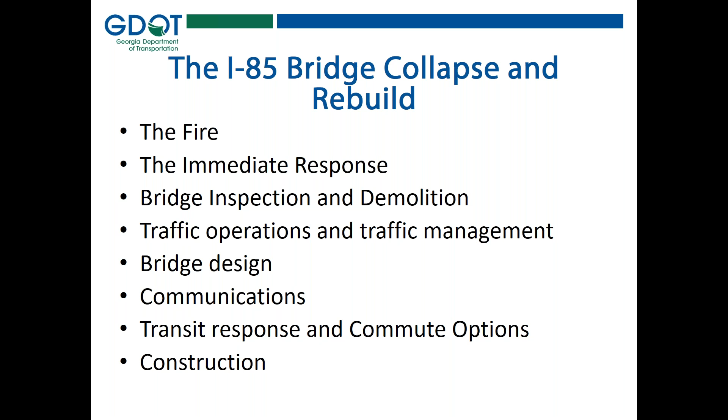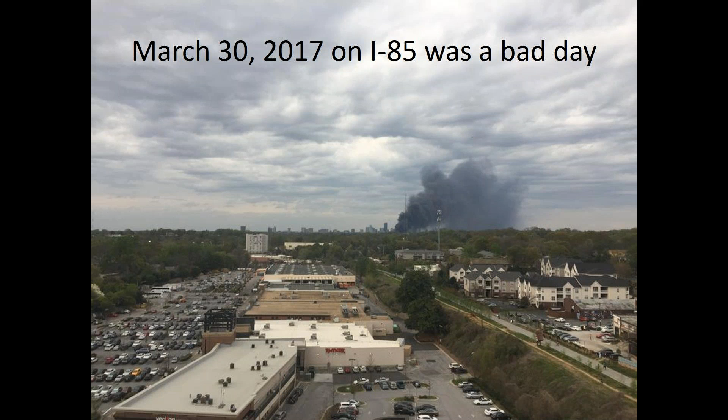So this was the view from my daughter's lacrosse game on March 30th, 2017. And I remember looking at the fire and thinking, gosh, what's going on over there? And then getting a phone call that it was a fire under one of our bridges. And then, not long after that first phone call, hearing that the bridge had collapsed. And for those of you who are not familiar with Atlanta, the tall buildings you see just beyond the smoke, that is not downtown. That is a northern business district called Buckhead. And so the main artery getting into the Buckhead business district, as well as downtown Atlanta, is Interstate 85.

So around 6:30 p.m., the fire broke out underneath I-85 northbound. At this stretch of I-85, it's a long bridge viaduct. It goes over some rail yards as well as some state highways, and then there's Peachtree Creek just north of the area. So it's a very long bridge viaduct. And if you can see, this is the beginning of the fire, and there's a lot of plastic HDPE conduit that was stored under the bridge. This was property that belonged to Georgia DOT, and there was a fence around it with a sign that said, "No trespassing, property of Georgia DOT."

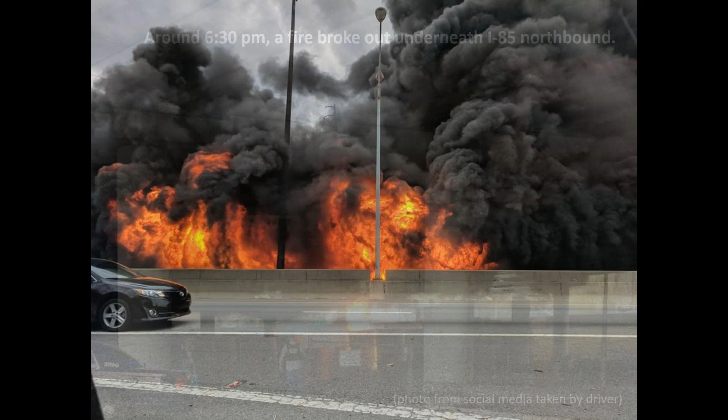And we don't really have all the information on who started the fire and why, but it quickly spread because there was a lot of material stored under the bridge. And this is the kind of plastic piping that you put fiber optic cable in when you're installing, for instance, an intelligent transportation system. So the fire grew very quickly. So it started at 6:30 p.m., but it was really looking like this, I'd say, within 15 to 20 minutes. It had really roared out of control.

And it's interesting to note that our main intelligent transportation system fiber optic cable trunk line is attached to this bridge. So when this fire started, we lost connectivity to our ITS system, which provides all of the message signs and video to view what's going on the system. Luckily, it had been in place for over 20 years. We'd never had to use our redundant system. We'd never had to actually rely on that. But in this case, the redundancy did kick in, and we regained connectivity to our cameras and signs on the system.

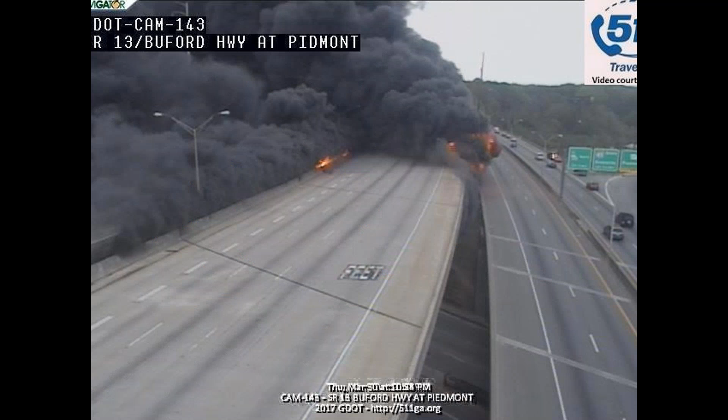So here's a couple of pictures that show the view from our cameras, from our 511 navigator system. What you're looking at here, the 5 lanes in the middle of the photo, that is I-85 northbound. Just to the right of the photo, there's a collector distributor roadway that we call the Buford Spring Connector. This is evening rush hour in Atlanta.

At this point, luckily, the traffic had been stopped and was not crossing the bridge. But as soon as we knew there was a fire under the bridge, our bridge inspectors had been summoned to turn around and come back to work and get to the bridge. So they were already en route.

What you can see in the top right of this photo is actually the transit system for the city of Atlanta, MARTA. That is their rail switching yard. So this bridge is very close to a major transit system there as well. And you can see that the collector distributor is sort of lower than the interstate highway there.

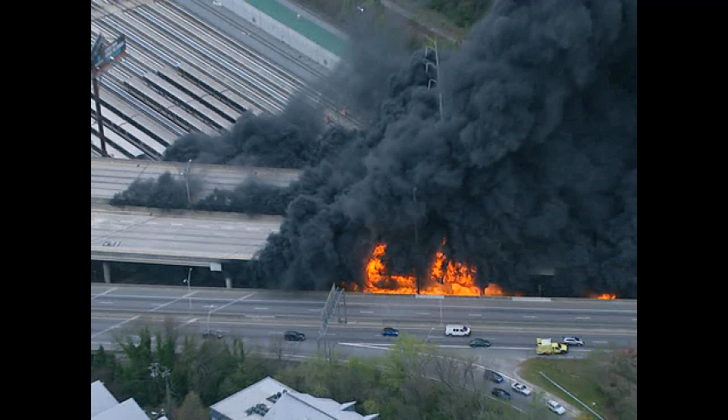So I-85 also crosses a major state route in Atlanta. It's State Route 237 Piedmont Road, and that's the road where the fire trucks are parked here. Emergency personnel were immediately on hand, and the Georgia State Patrol had stopped the traffic. The City of Atlanta Police were on hand, as well as emergency response units that work for Georgia DOT - we call them our hero units. And of course, Atlanta Fire and Rescue, and they were battling this fire as best they could.

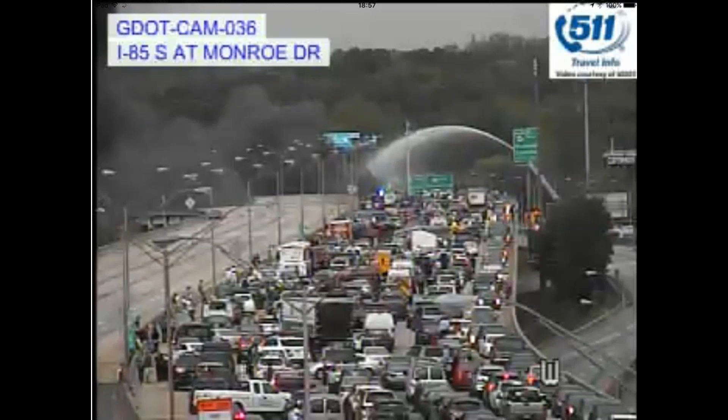Some of you may or may not be familiar with Atlanta - we're pretty well known for having some big traffic here. So you can see people hanging out on the bridge south of the fire, and traffic had been stopped for a while, and they're waiting to see if they're going to be able to get off this bridge anytime soon. I would say that the entire system was pretty much in gridlock.

This section of I-85 carries about 243,000 cars a day. This is a major commute route to our northeastern suburbs. And it's also, you know, in Atlanta, we use our interstates almost as local roads. So it's also a major route just between Buckhead Business District and downtown.

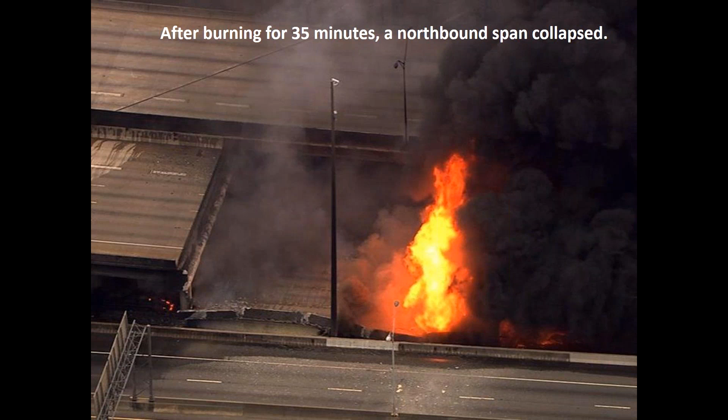So after burning for 35 minutes, one of the bridge spans collapsed. It was a northbound span. Luckily, no one was injured in this event at all, thank goodness for the police. Really, literally like 2 minutes before the collapse, the fire chief could hear the tensioning strands in the bridge starting to pop, and he immediately pulled back all the firemen, so no one was hurt at all when the bridge fell.

As soon as the bridge collapsed, at Georgia DOT, and probably at every DOT, there are some pretty routine things that we practice regularly for responding to emergencies. So immediately, all the folks who are on our Emergency Operations Committee started heading to our Emergency Operations Center to respond to this event. And we were met there by the Georgia State Patrol Commander, the Georgia Emergency Management Agency, the City of Atlanta had people there, as well as the Federal Highway Administration. This is Thursday evening, about 7:30 p.m., and everyone starts rolling into the Emergency Operations Center.

So the next few slides go through a timeline of our response. As you can see, the fire started about 6:30. About 35 minutes later, the bridge has collapsed, and we are all heading into work. Our state bridge engineer was actually having dinner with his son and brought his son to work because he had to leave immediately and head downtown.

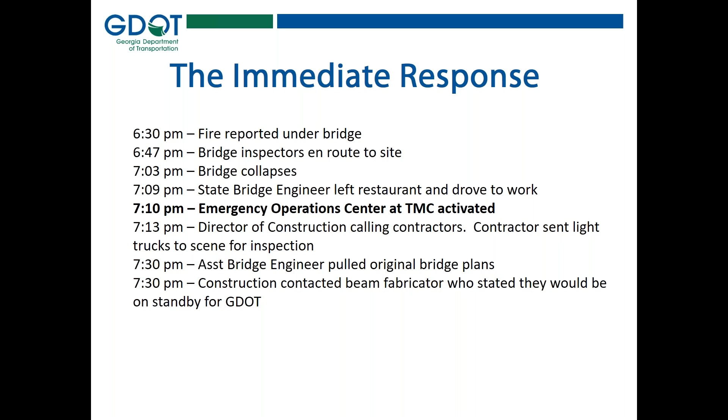For the next few hours, we were all on scene at the Emergency Operations Center, having hourly conference calls with our inspectors on the scene to get updates. The FHWA division administrator who was with us at the Operations Center let us know we needed to get our governor to declare a state of emergency so that this project would qualify for federal emergency relief funds. So we did that.

We had their immediate approval to negotiate with a single contractor because we knew that this bridge collapse was going to cripple traffic in Atlanta, and it really did. So they were very much in support of us following already allowed procedures in emergency relief and federal highway to negotiate with a single contractor.

At about 10:30 p.m., the contractor who had come with the light trucks called a demolition contractor, and they arrived on site because we knew that we would need to be able to get to work as soon as possible and show the public that we were making progress very quickly on this bridge.

At 11 p.m., there was a joint press conference held at the scene of the fire, which was still burning quite largely at this point, with the governor, the commissioner of DOT Russell McMurray, the City of Atlanta Fire and Police Chief, FHWA, our Georgia Emergency Management Agency, and the State Patrol.

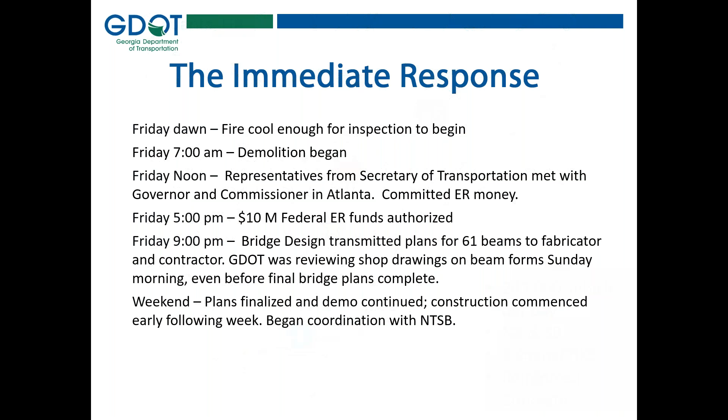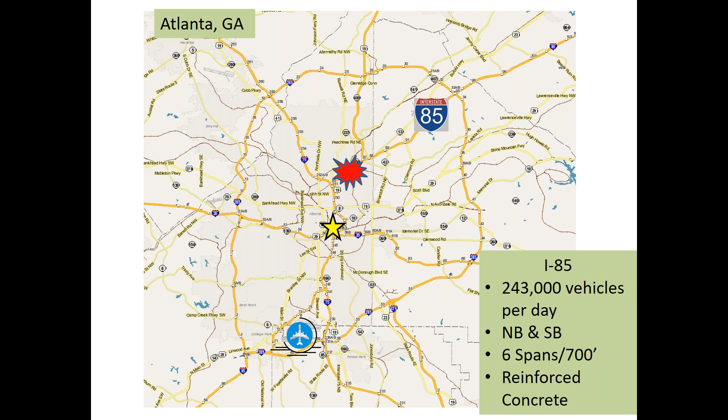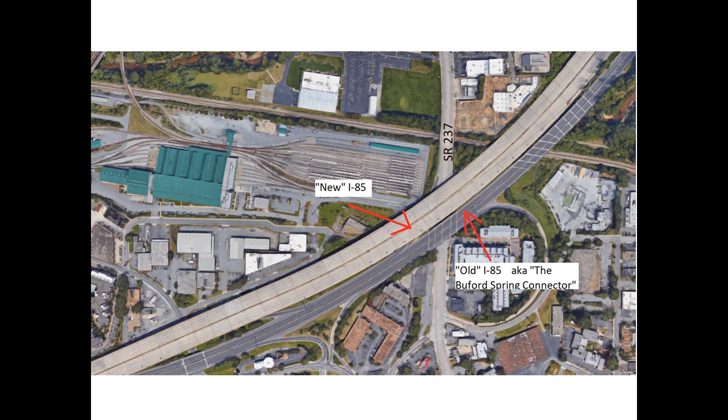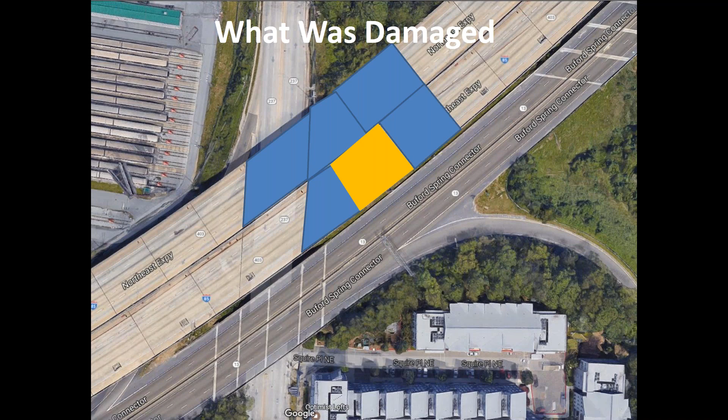Our inspectors, after they spent the night in our trucks, had to actually use water to wash off the bridges so that they could see to inspect. It took a while for everything to get cool enough to actually get in there and look.

They used hammers to sound the concrete, and they found serious delamination and spalling of the concrete beams, the columns, and the caps in the 5 adjacent spans. So we knew immediately that we were going to have a lot to work on.

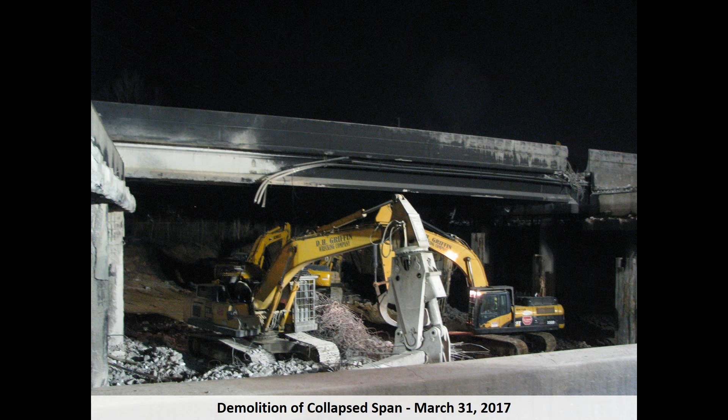Demolition commenced the next day, with a contractor called D.H. Griffin out of North Carolina. They happened to be in town because they were demolishing an old GM plant north of Atlanta, so luckily they had this equipment very close by.

We immediately contacted a consultant firm in Georgia, Moreland Altobelli, and they committed to doing the construction engineering and inspection for the rebuild of this project. We also contacted the contractor who did the work for us, which was C.W. Matthews.

During the demolition, Moreland Altobelli, the CE&I consultant, kept track of the labor and materials and equipment because the demolition was done under force account.

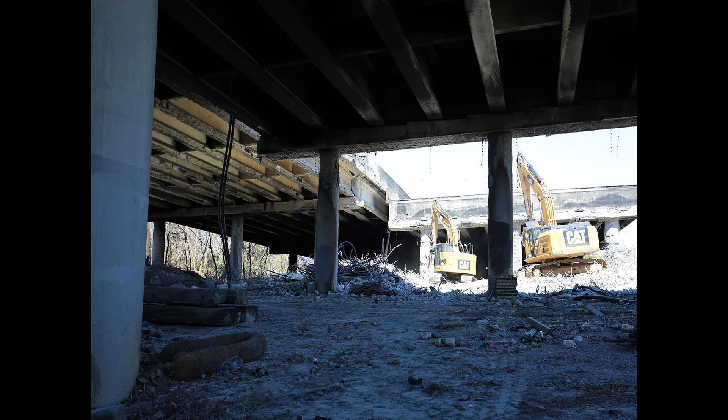You can see some of the equipment they were putting to use here. They used hydraulic crushers to literally chew away the bridge, and these machines separate the steel and the concrete concurrently. It was all hauled away in dump trucks, and within a week, the site was completely clean of debris - they worked 24/7 on demolition.

The inspectors were on site during demolition to make sure that elements of the adjacent spans that were to remain in place were not damaged.

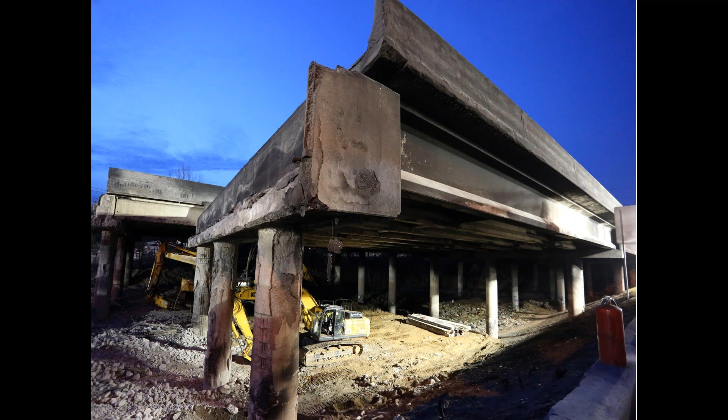This demolition shows that some of the damage was to the columns and the caps, but you can notice that the beam support did not fall - it was the beams themselves that collapsed. The extreme heat caused the tensioning strands in the massive pre-stressed beams to relax, and thus they failed and collapsed.

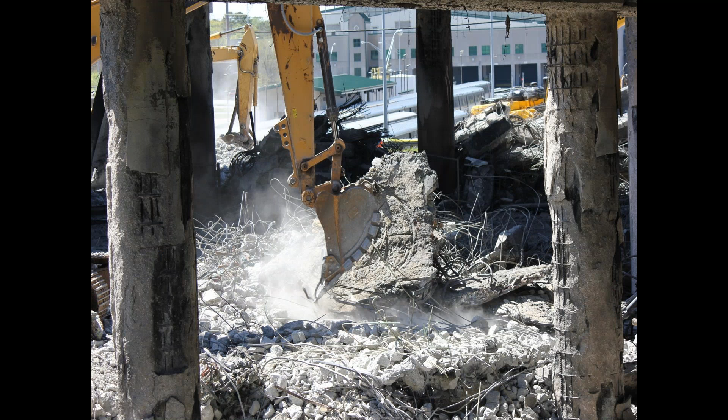Just so you know, this bridge was actually built in, I think, 1984 or 85. It was a good, strong bridge, in good condition. So it's not like this was an old bridge that had already been compromised in any way. This was a good, strong bridge.

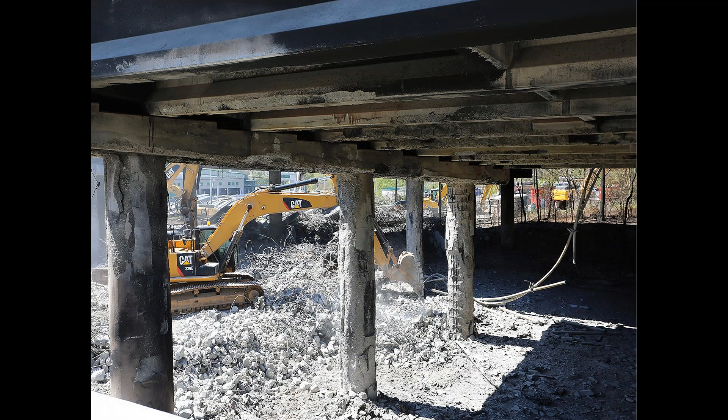You can see from this picture the rebar being exposed on the columns, and the column reinforcement appears to be buckling. Our bridge design team had to make quick decisions about what could be recovered out on the site and reincorporated into the new design, or if it all had to come out. We ended up keeping part of the columns, and I'll show you some of that in the upcoming slides. You can see here where the concrete on the columns and the beams had delaminated.

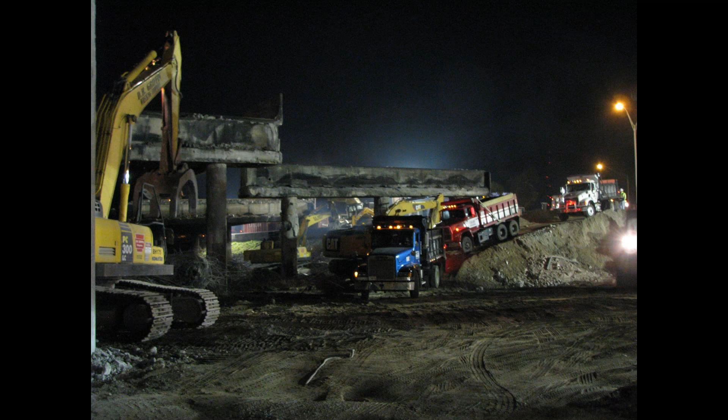Just a couple more pictures of demolition. And this is one of those giant pneumatic crushers. They looked like little alien monsters. And of course, the demolition continued 24 hours a day, 7 days a week. And yes, there is an apartment building right next to this bridge.

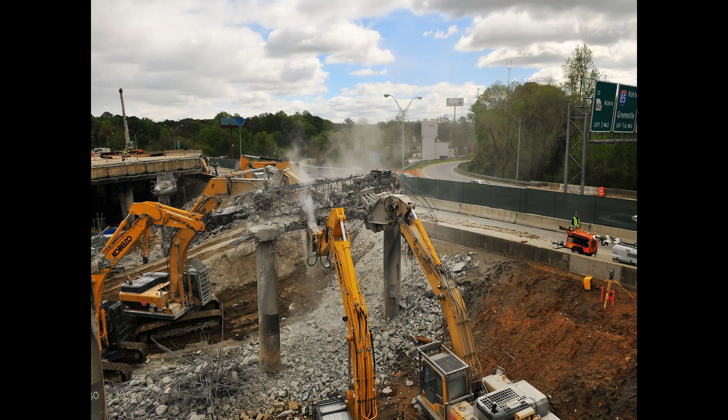So we didn't make all friends; in this speedy repair of this bridge, there were some people who were really unhappy. But it was really important to get this done quickly. And they had a lot of equipment put to work, and so the demolition progressed so quickly because they had so much equipment out there getting it done.

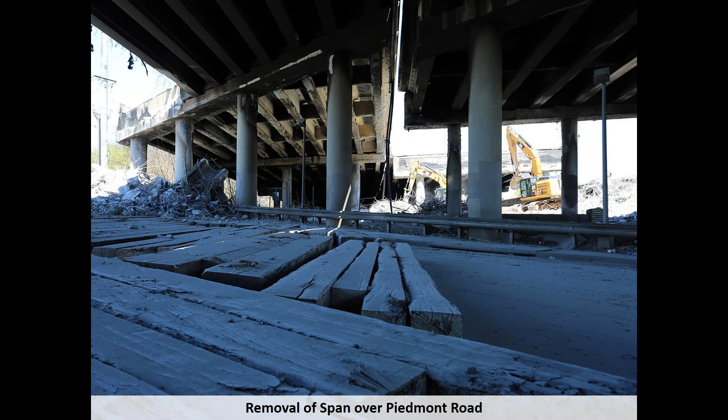One of the critical things they had to do was remove the bridge spans that are over State Route 237, Piedmont Road. And so you can see here the contractor placed timbers over the roadway for protection as the beams above it were removed, because we knew that at least we needed to get Piedmont Road reopened, even though I-85 was going to be shut down for a while.

So those initial few days where Piedmont Road was shut down and I-85, it was really hard to get across town without going way, way out of your way. So with the span removed, Piedmont eastbound could be fully opened, and then the 2 lanes westbound could be open a couple days later.

So this sort of starts where we really had to look at how we are going to keep moving traffic through and around Atlanta and to the Buckhead Business District, and even to the businesses surrounding this collapse. And so our state traffic operations engineer worked very closely with his team and with the city of Atlanta to look at roads that needed to be restriped and how to best get traffic off of the interstate. We actually changed the direction of a couple of one-way streets. We put a lot of things in place to try to make sure that the traffic could still move around and do what we could from a traffic operations perspective to increase throughput.

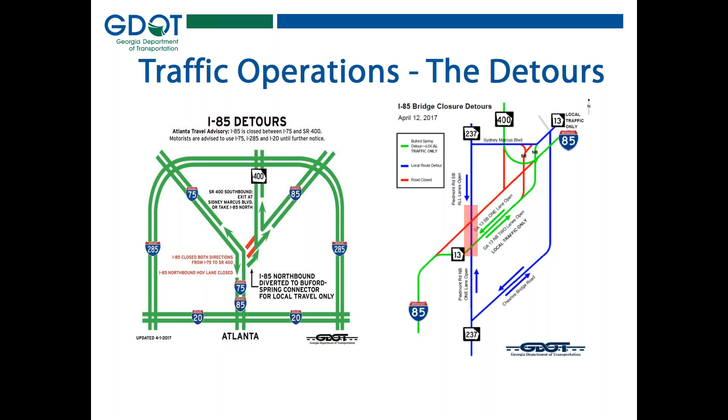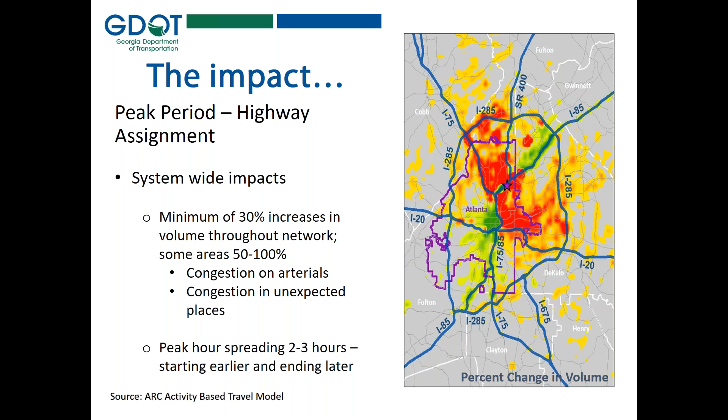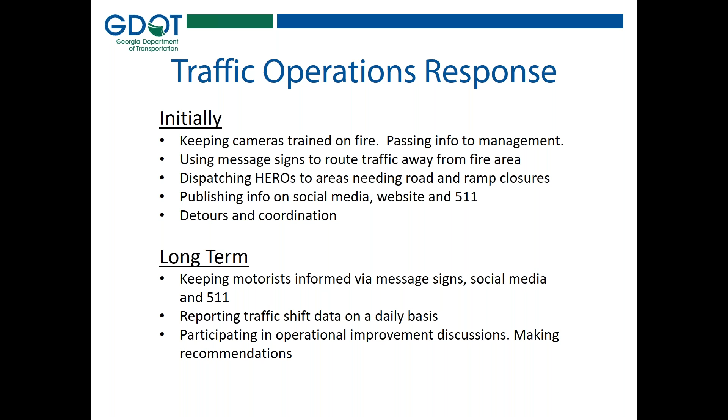So as part of our traffic operations response in the emergency situation, we kept the cameras trained on the fire, we had our HEROs dispatched, and we started pushing information out through our 511 system. But long term, we really had to keep motorists informed via message signs and social media. We reported traffic shifts daily as things were able to close and open. And we participated in a lot of operational discussions with the city of Atlanta.

But one thing we had to do is we halted all lane closure permits in the metro area, whether for buildings or utility repairs or other projects, because we just couldn't afford to have lanes closed anywhere in the vicinity of this detour.

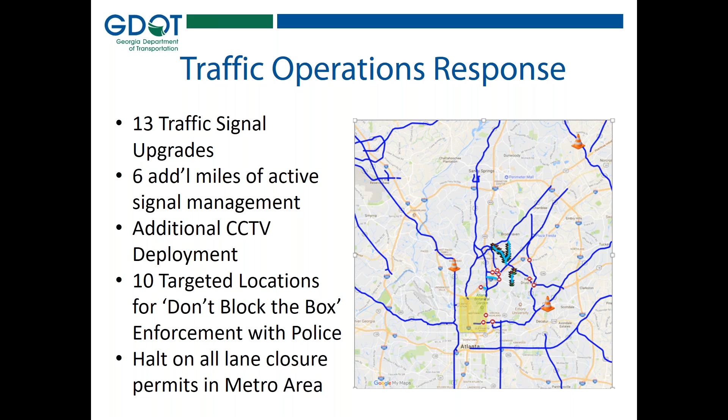So now I'm going to talk a little bit about the bridge design aspect of this project. So sequential to the demolition, bridge design began working Thursday night and immediately started looking at what were their options for design. Because of the complicated trapezoidal spans, they had to make a decision: could they use the original bridge design or did they need to redesign this bridge?

So the original bridge was designed using AASHTO Type 5 pre-stressed concrete beams. And there really are no forms left at the concrete casting suppliers for that type of beam anymore. So we knew that if we were to go with the original bridge design, it would be a long time getting those beams fabricated and to the site.

So they instead decided to change to a more commonly used beam that we have now, the 63-inch bulb T beam, because there are many forms available, and so we would be able to get the bridge beams cast much more quickly. But this required a complete redesign of the 6 spans of the bridge. But in their talks with the contractor that makes these beams, it was decided that really, if we wanted to get this bridge open quickly, that was the only way to go.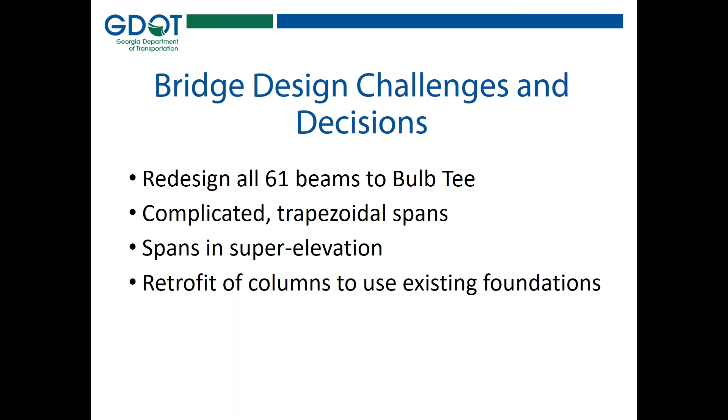So we said we need to have a press conference and try to address everything and answer questions right up front. So our construction director talked about the plan for rebuild. I talked about the redesign. Our commissioner talked about the material under the bridge. And then our traffic engineer, Andrew Heath, talked about the detours and what we were going to do to try to manage traffic in the meantime.

But really, the communications effort on this project was huge, and it continued for the next 6 weeks, where we had weekly press conferences out on the job, and our social media following increased 100-fold, because really this just had Atlanta paralyzed, and everyone was waiting for information about this bridge.

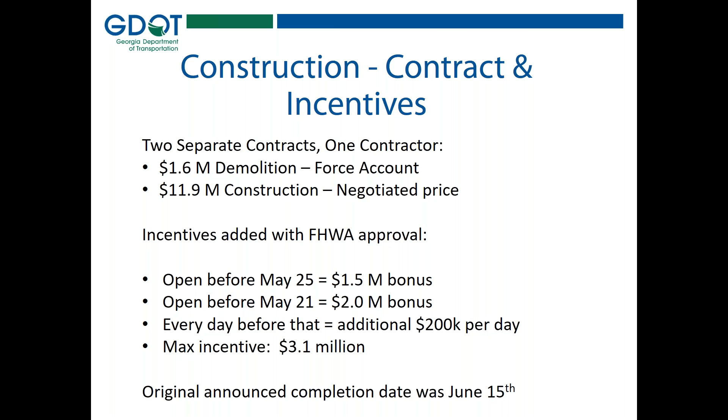So what we ended up getting was actually 24/7 work because the contractor was very incentivized by that maximum $3 million bonus. And weirdly enough, we had half a day of rain in that whole 6-week period. So they had perfect weather for construction for 6 weeks.

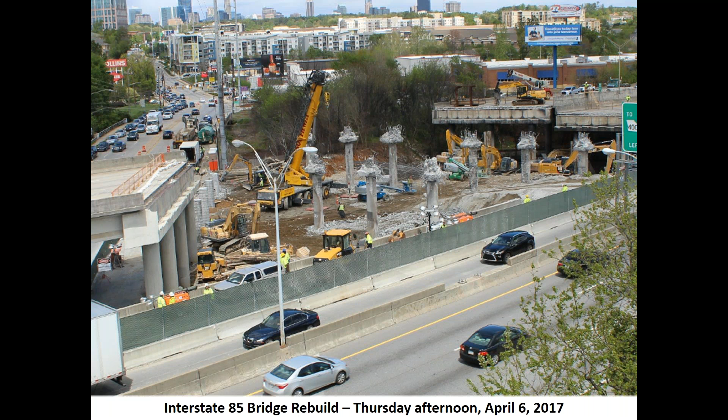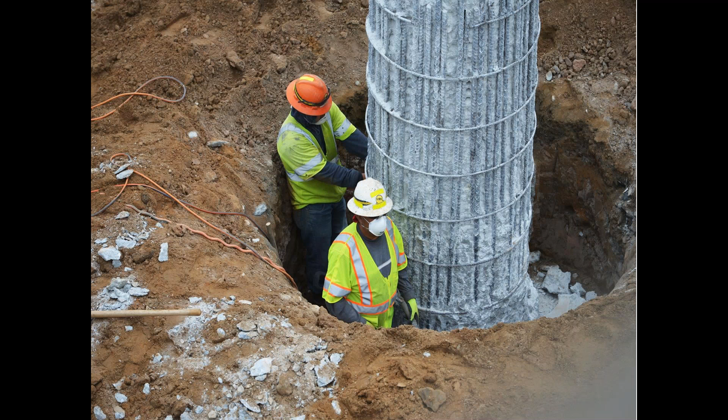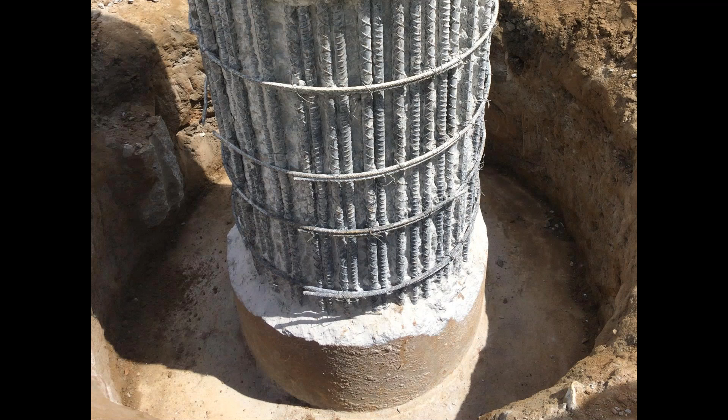Here you can see where they had to do handwork to remove the damaged concrete from the columns. This was pretty time-consuming, but since it allowed them to retain the inner core and the foundation of the column, it was worth it. And here's where they're finishing removing that outer damaged concrete to expose the steel. And that's what it looks like before they pour the new columns. So you can see here in the middle, those cages, those are larger round cages for the columns that they then set down over the existing columns.

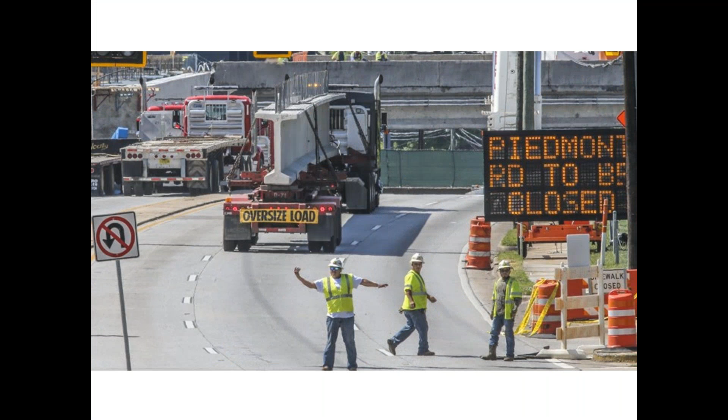This is a picture of one of the giant beams that was coming to be delivered on the site. Normally we would not allow these kind of oversized loads to go through during rush hour or anything like that. In this case, these beams were delivered as soon as they were ready, and there were literally people on the interstate cheering them as they went by because they were so excited to see the progress happening. And we had Georgia State Patrol. They escorted all of these beams to the site from the plant.

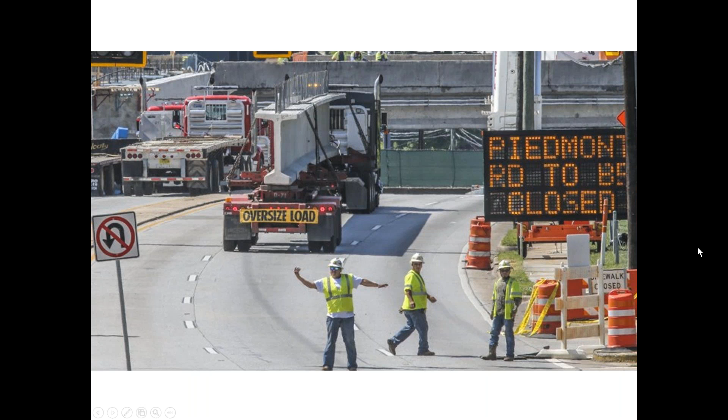For some reason, my slides quit forwarding. There we go. Okay.

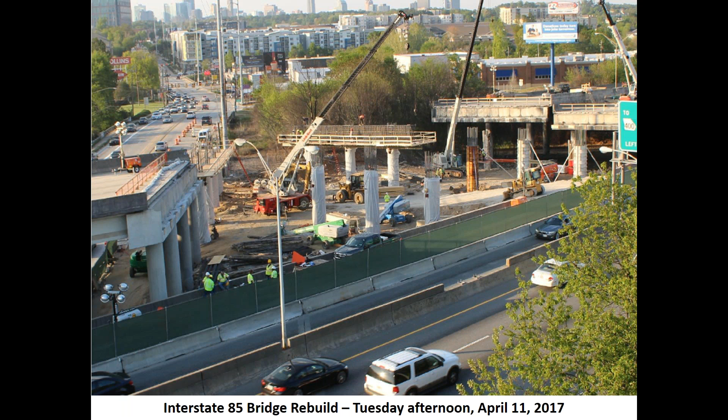So this is about 5 days later. We have some of the bents poured, ready for cap pours, and columns are also getting poured as well. You can see they're wrapped, and progress is happening on construction.

The contractor built a haul road that was stabilized with some asphalt millings, and they are preparing to bring in an 800-ton crane. And really, this was a strategic decision on the part of the contractor because they didn't have to have that big of a crane, but because they chose to pay a little extra for that big crane, they could place all of the beams without ever moving the crane. And so it definitely saved them time and got them closer to that incentive.

As you can see here, there are some really big power lines that stretch over the bridge. So the contractor really had to plan their work around that high tension power line so that there was no disruption there. And I give credit to the contractor because they were working 24/7 to get this bridge done as quickly as possible. They literally had a plan for each hour of work, and they knew what was going to be accomplished all along the way. They really executed well.

The incentives really drove the schedule. So we knew pretty early on that they were on track to finish early, but due to the uncertainty of weather, and you know, if one of these beams had cracked or gotten damaged, it could have delayed the project another couple of weeks. So we didn't make any announcements about how far ahead they appeared to be until we were getting really close to the finish line.

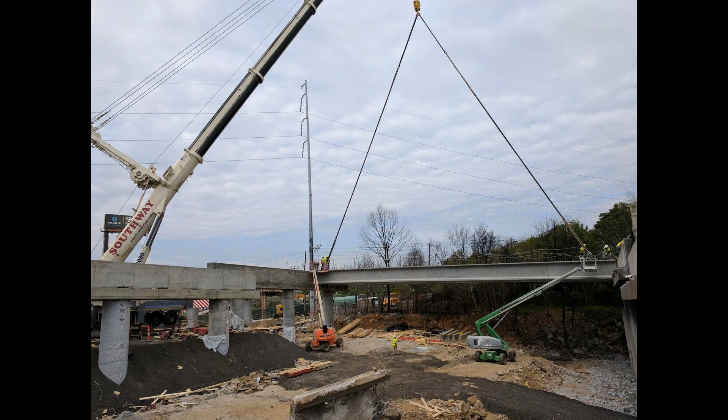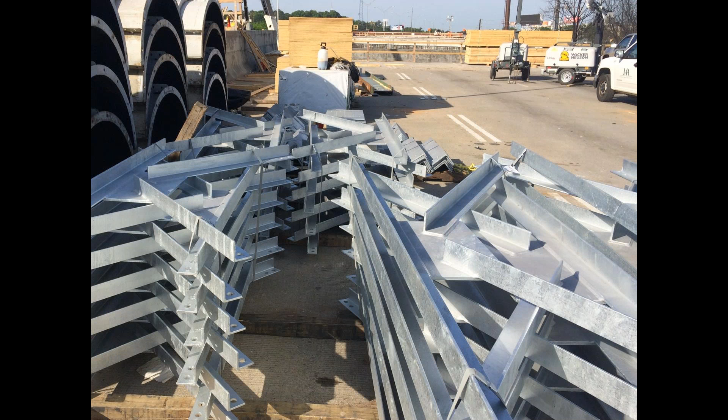So the first beams were put in place, and you can see here where they're placing the beams with the crane, right next to the power line. So we use steel diaphragms on the bridges instead of concrete diaphragms, really just to save time. And we've used these before on bridges in Atlanta. And even though we typically use concrete, we know that the contractor really appreciated the use of the steel diaphragms here.

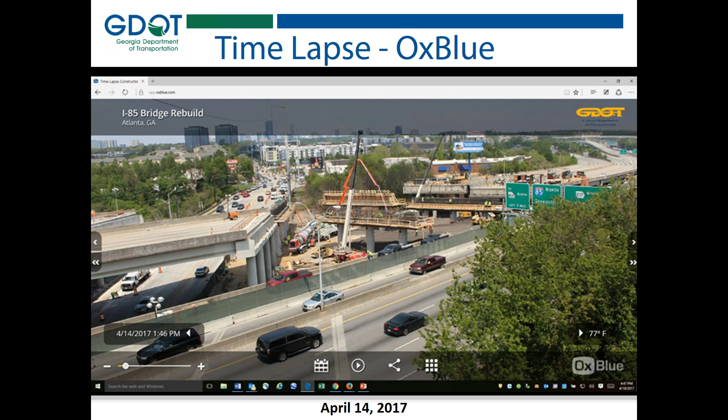So starting April 14th, this is about 2 weeks after the bridge collapse. You can see the construction really starting to take shape. And I'll just walk through the next couple of weeks. A week later, you can see that all the beams northbound are pretty much in place. And then a week later, beams southbound and northbound.

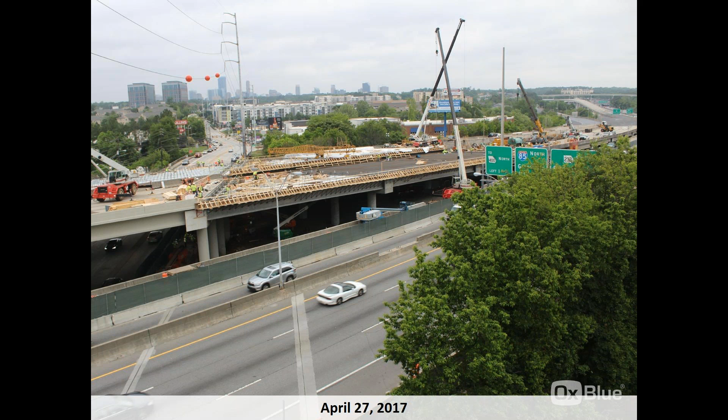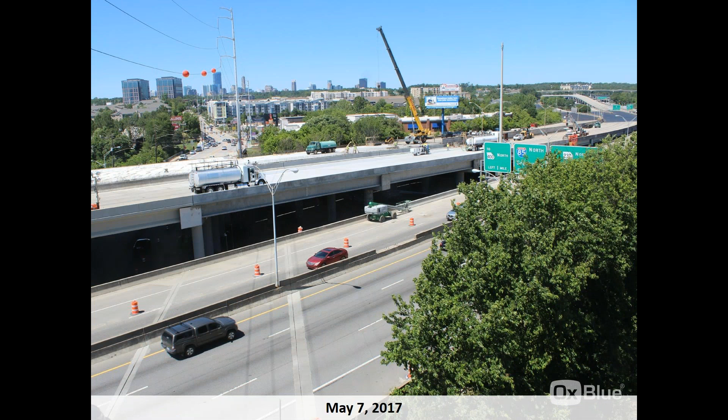And then you can see that the contractor is running out of open space to work now that he's got the beams in place and he's starting to get ready for the deck pours. This is a very tight construction area because there are roadways and development all around it. Here they're preparing for the deck pour. Here you can see the final deck pour is in place. And finally, May 13th, 6 weeks later, the bridge is open. So, as you can see, this happened pretty quickly.

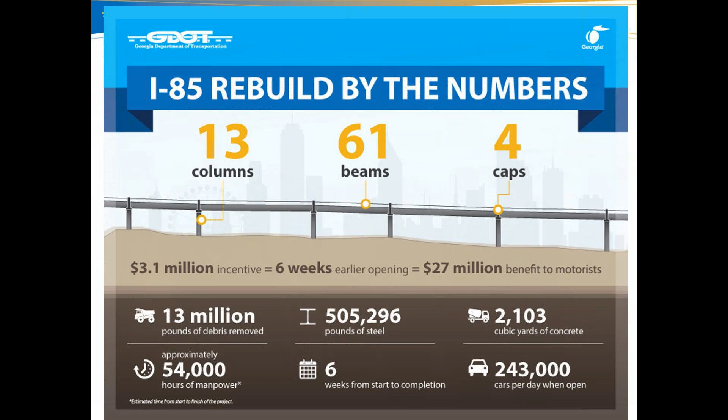And this is just some numbers: 13 columns, 61 beams, 4 caps. We did have a ceremonial ribbon cutting after the bridge was open. We held it under the bridge, and Secretary Elaine Chao did attend that with us, just to celebrate getting this done quickly and successfully. So I am happy to take any questions.

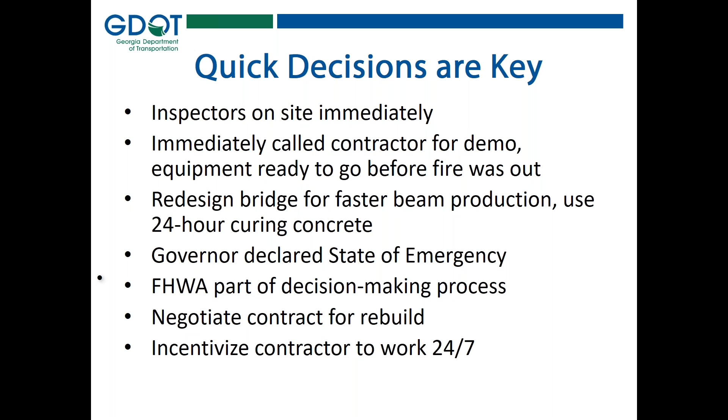We do have some. I would just like to say that quick decisions are really key in a situation like this. You know, the decision to go with a contractor immediately, to put incentives in the contract, those are things that were all decided very early on. And then some lessons learned. We needed some signal contractors on call for emergencies. We've since put that in place. And in a situation like this, you don't have time to wonder about what to do. You have to escalate issues quickly. So, all right, I'm happy to take any questions.